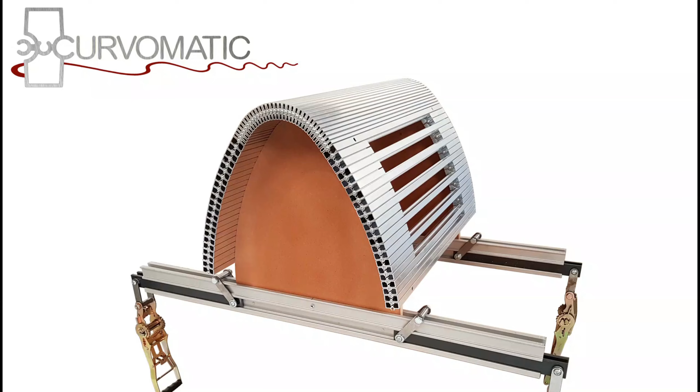Clamping panels with a skin of Curvomatic and ratchet straps onto a one-part mold works perfectly for convex shapes. Panels with flat sections can also be pressed with a one-sided mold, but these do require additional clamping.

Two-part molds allow a variety of shapes to be formed. Our beams are easier to use, but wooden beams give the same high-quality results. Curvomatic also makes a great flat press if you have slightly convex formers on both sides.

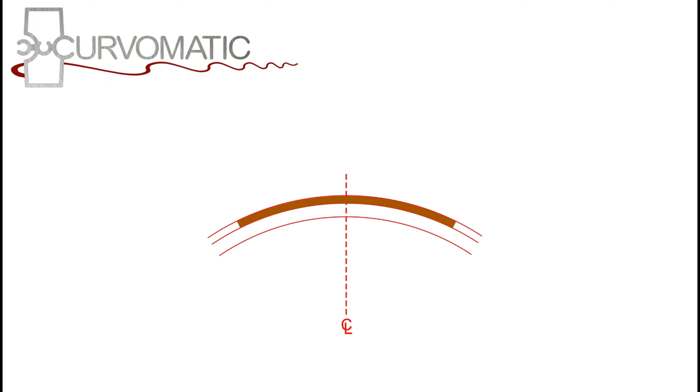Design your formers by drawing your panel full size or with CAD. Draw simple curves symmetrically around a center line. First, draw your panel with its cover sheets. Draw the outside of the two layers of Curvomatic, 35 mm from the panel.

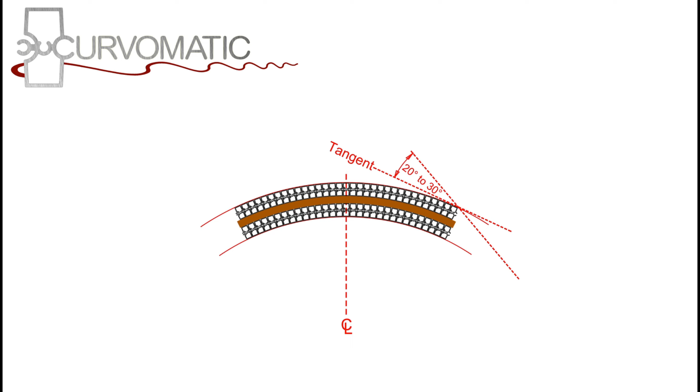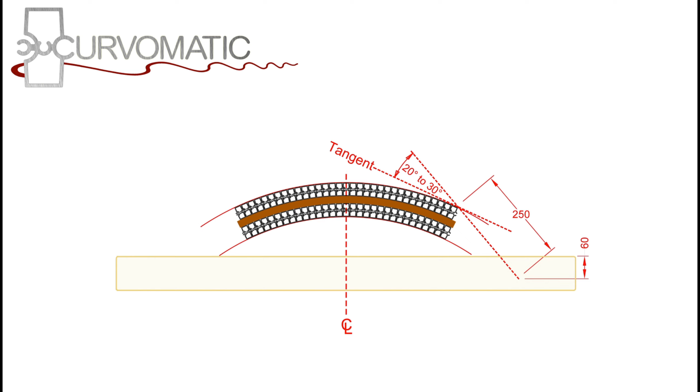Draw a line at 20 to 30 degrees from the tangent at the end of the clamping skin. Mark a position at least 250 mm along this line from the skin to allow for the ratchet. Now draw in your beams with the 250 mm mark 60 mm from the top of the beam. With our beams you need to add 30 mm to the bottom of the former. You can also use the rollers to make the formers smaller if required.

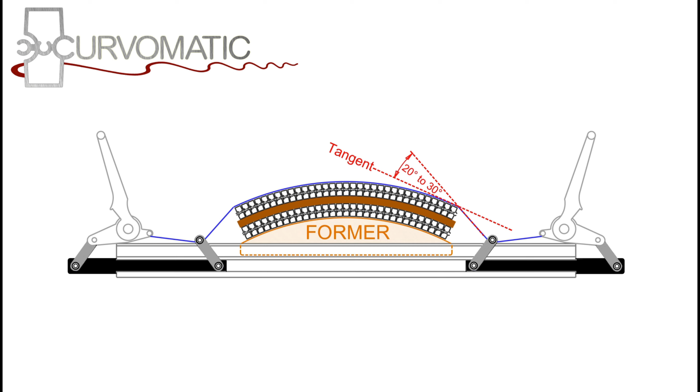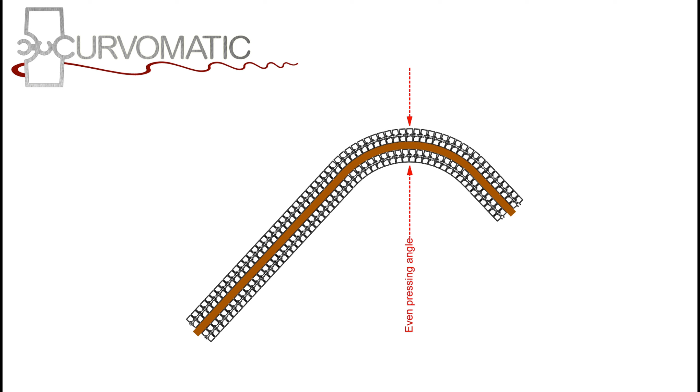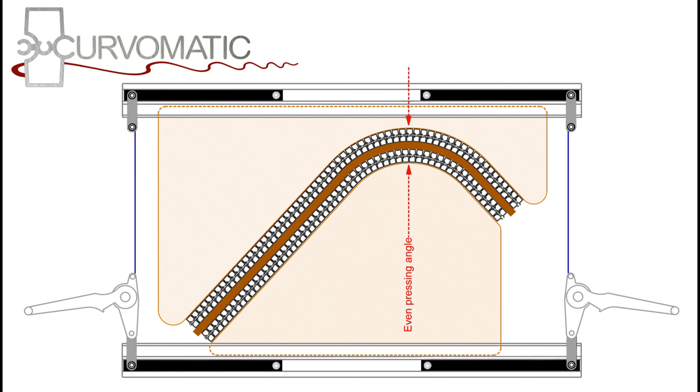With two-part molds, design your formers so that pressure is distributed evenly through the pressing surfaces. This L shape, for example. Set up with the pressing surfaces at 45 degrees, the pressure acts on both surfaces equally. To reduce the size of the formers, you can also clamp at an angle to the beams. The clamps must run parallel to the even pressing angle.

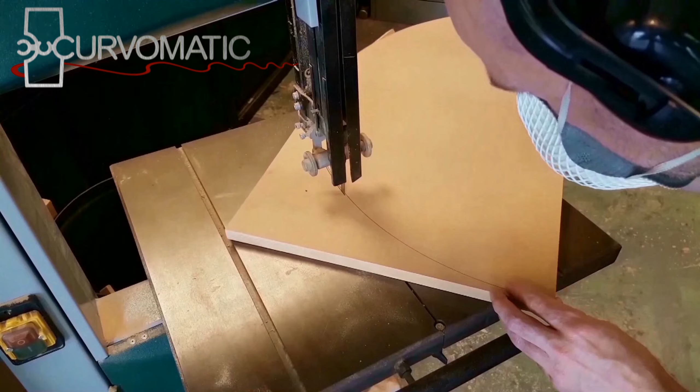Cut your formers from 18 mm board. MDF is usually suitable, but it can be damaged by multiple uses. Use plywood for multiple-use molds and when using the 25-degree extrusion, as the extreme pressure can damage the board.

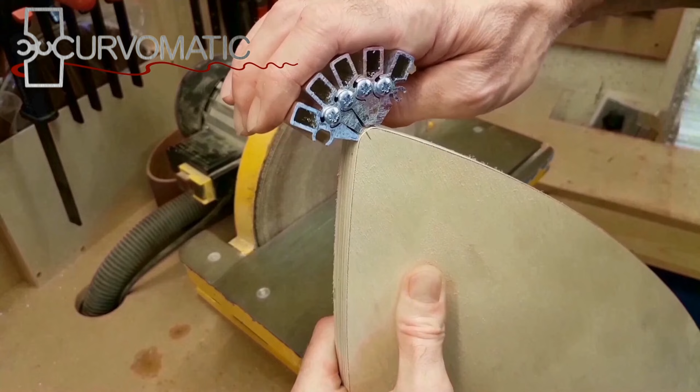For regular curved panels, drill pilot holes in the center of the formers to attach the Curvomatic skin. When using the modular kit at 8 and 10 feet, you will need blocks on either side of the former to take the skin fixings. With Curvomatic beams, the formers drop into the channel, and are fixed with a grub screw.

For wooden beams, we recommend using 46 by 90 mm hardwood. Drill a series of 6 mm holes in the beams for attaching different size formers, with one hole in the center to screw into the pilot hole in the former. Then counterbore to a depth of 50 mm. A 100 mm screw should be able to extend 60 mm into the former.

Drill a series of 12 mm holes to attach the ratchets. These should be around 25 mm apart and 30 mm up from the bottom. With wooden beams, mark and drill pilot holes to fix the formers to the beams. Use 100 mm screws.

For S shapes, mark and drill the center pilot hole for the skin fixing, at the change of shape position. Curvomatic should always be configured as solid anywhere the shape of the panel changes from convex to concave, or from curve to flat section in the case of L-shaped panels. For L shapes, the pilot holes for the center skin fixings should also be where the shape changes from flat to curve.

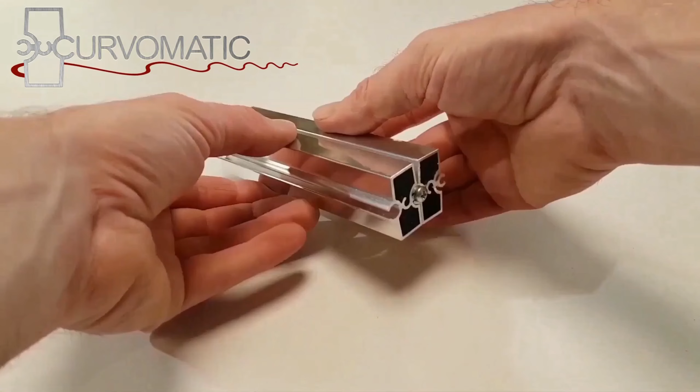With all double hollow kits, you must first assemble the short lengths in pairs and insert a screw into the center hinge screw port on both ends. The sections must hinge freely. Assemble your double hollow kit at 2 foot long, by laying out enough components to make half of your mold skin. Slide them together and insert hinge screws into any empty hinge screw ports.

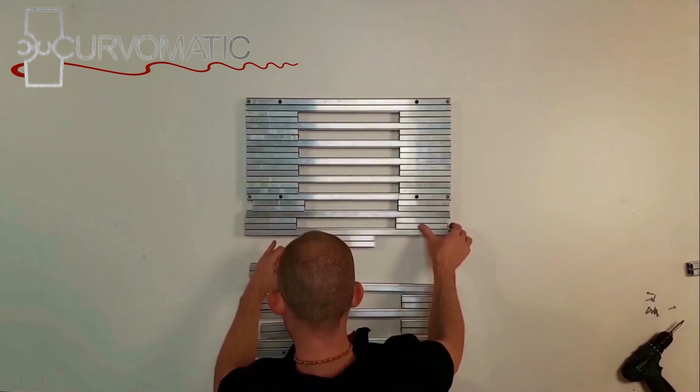The outside edge should have 2 full lengths, as the forces here are greater than in the center sections. The outside and center extrusions should be drilled to fix the skin to the formers. Repeat this process to complete the mold skin. The clamping skin is constructed in the same way but without drilled sections and with the addition of one extra full length on the outside edges.

A double hollow configuration, meaning 2 gaps between the full lengths, is suitable for most laminating work, but a single hollow setup, with only 1 gap, is better when applying thin surface veneers. To turn your double hollow kit into a single hollow kit, just remove half of the short lengths. This will, however, reduce the working width of your kit by around a third.

To reconfigure from 2 foot to 4 foot in length, remove the screws, and slide off enough extrusions to make up half the width that you require, then slide out the 6-inch lengths from one end. Take another half section, and join the two end to end, by sliding across the 6-inch lengths. Repeat this process to make the other side of the skin.

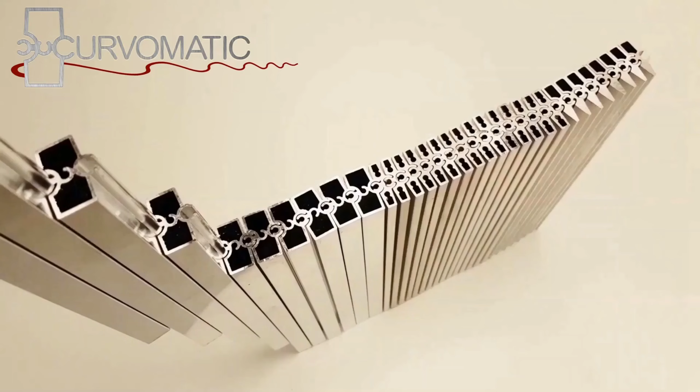Tighter radius sections are made using our two smaller extrusions in conjunction with your 185 mm radius kit. These are assembled in a half overlay pattern from 1 and 2 foot lengths and are fixed by the adjacent 4 foot extrusions from the joining kit. Slide the drilled 4 foot sections from the joining kit onto the edges to finish.

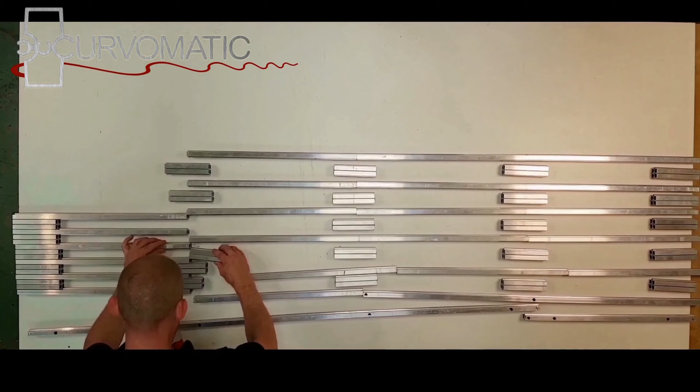To assemble your modular double hollow kit at 8 feet long, lay out enough 2 foot and 6-inch lengths to make half your mold skin. Slide all the components together with the 4 foot drilled section from the joining kit on the outside edge, and then slide the drilled 6 foot and 2 foot sections on so that the joints in the long sections overlap.

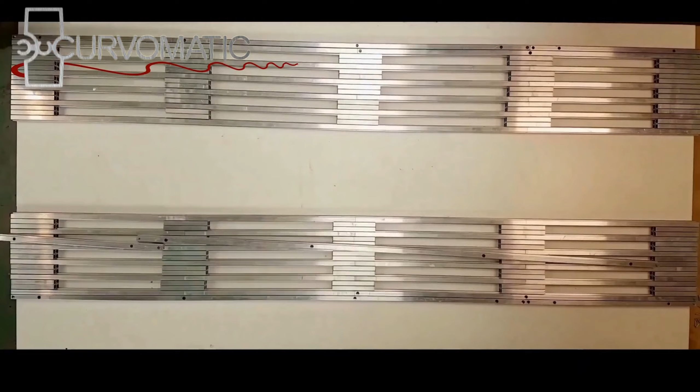Repeat this process for the other side. Join the two halves together with the remaining 6 foot and 2 foot drilled sections. Have the joint between the joining kit sections at opposite ends. The clamping skin is assembled using a similar method. Use the non-drilled lengths from the joining kit, and insert an extra run of 2 foot lengths on the outside edges, to make the top skin wider than the mold skin.

Place the skin onto the formers, and insert all the center fixing screws. Now position and fix the blocks to attach the ends of the joining kit. Pilot drill and fix the edges.

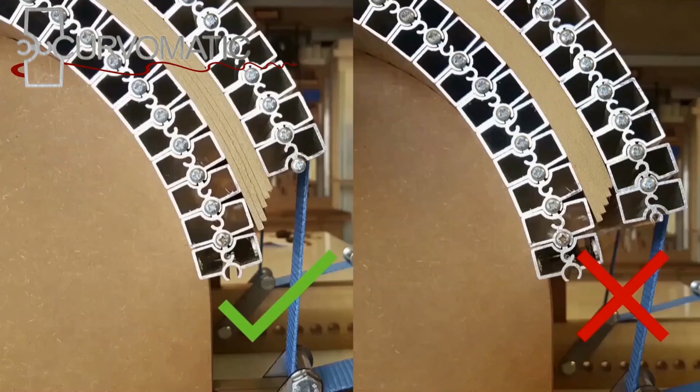Mark the center of your laminate pack and position pins at 10 mm to the side of that point. The pins need to protrude 5 mm from the pack. Place the pack onto the mold to do a dry run, with the pins sitting into the gap at the side of the center extrusion. Hold the top skin in place with pistol clamps during clamping. The clamping skin should never overhang the workpiece as it will deform the edge.

Remove the necessary number of extrusions so that the skin does not overhang the work. It is advisable to protect your Curvomatic with masking tape, especially when using waterproof glues. Apply your glue only to one side of each laminate and use as little as you can. The surface only needs to be wet for lamination to work fully. Use cover sheets on both sides of your laminate.

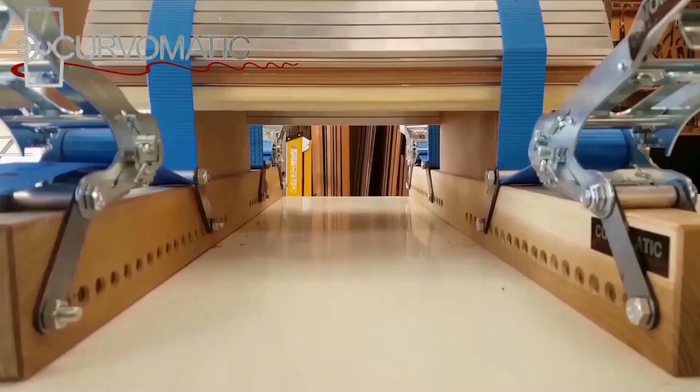Hold the top skin in place with pistol clamps. If you do not tighten the ratchets evenly from both sides, the clamping skin will be dragged to one side. To avoid this causing a problem, keep an eye on the position of the pistol clamps, as they will move with the clamping skin. Tighten the ratchets accordingly to pull the skin back into its correct position. To make sure that your mold is not twisted, you should sight across the bottom of the extrusions.

For two-sided pressing, insert the nails through the laminates at the contact point with the mold, and place the top part onto the laminates. Feed the straps through the rollers, and put both ends through the ratchet handles. Tighten the ratchets evenly from both sides. The system will work with very little pressure if the setup is correct.

When clamping flat sections with beams, you must always clamp to holes in the formers or you risk deforming the panel. This clamping method is also used for U-shapes.